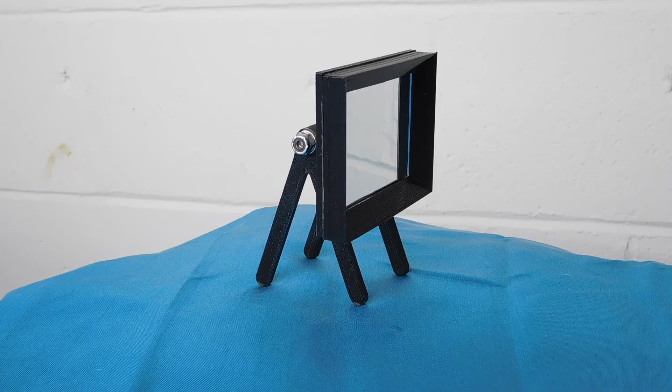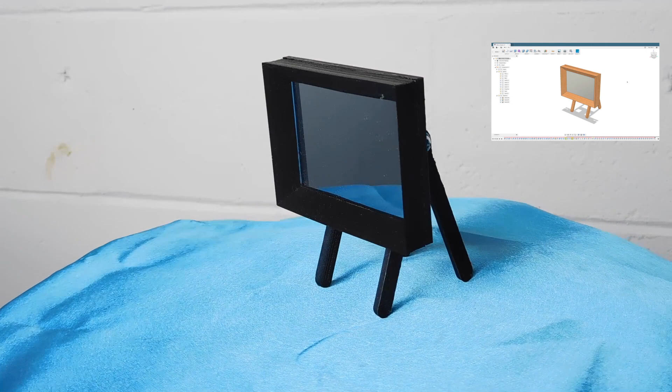I had a mirror on my studio desk for years. I used it to see if anybody was coming into the studio. It's pointed towards the door, and if I see something flash, I know somebody's walking in. It's worked really well, except the little plastic stand it was on broke recently.

Which made me think this would be a good time to practice making snap-together joints and redesign the mirror stand. What we have is a small easel-like stand. I like to design simply, without supports or being too large.

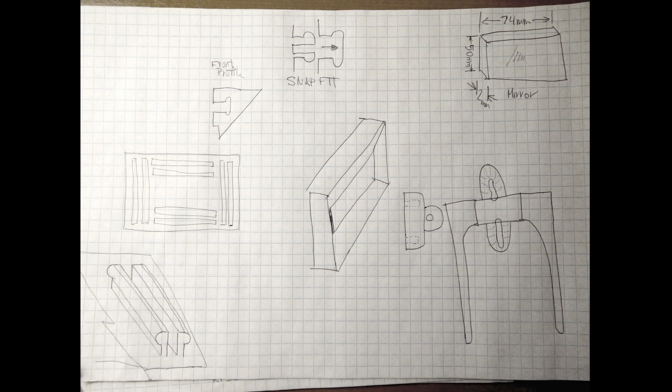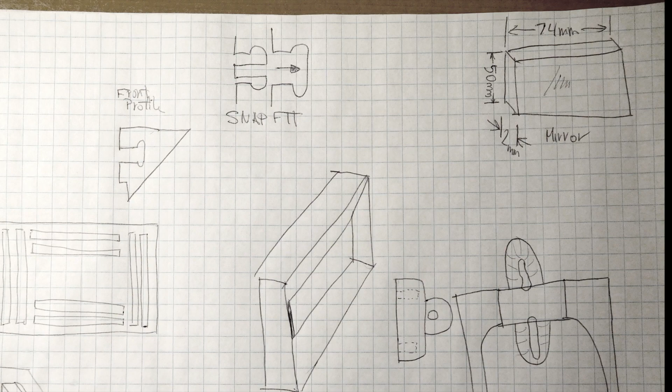As usual, this project started with a drawing. The size of the mirror is taken down, and I've drawn out a few details for the frame and stand. Now that we have a good idea for the basic shapes and have written down all the known dimensions, we can move to Fusion 360.

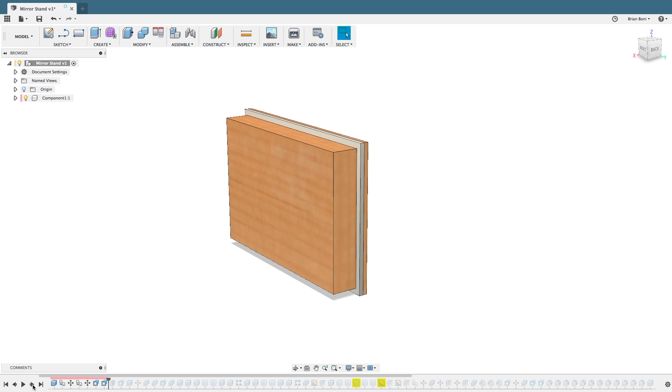I start by putting a bunch of boxes together. This box represents the mirror, with another box in front of it to represent the back of the frame. This one's going to represent the front of the frame. I'm taking another box just slightly smaller than the front and putting a 45-degree draft on it, which will cut out the picture frame from the front frame.

So here's the first part that is going to make up the male side of the locking clip. I copy another one beside it and add the round sections that's going to be the locking end. Then we duplicate that for all four sides. That works pretty nicely, so we'll combine everything into one component.

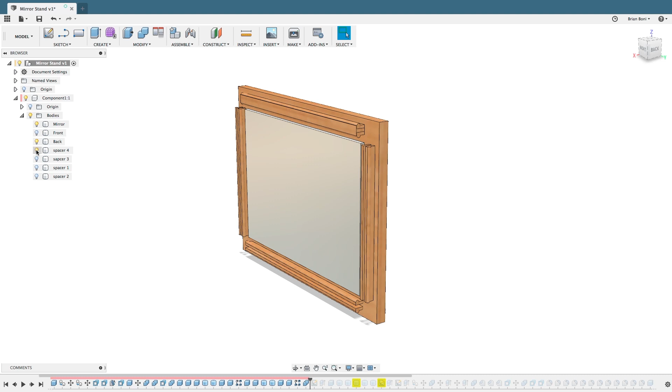Now how do we cut out the part from the other piece? What I've done here is create a set of spacers that will leave enough clearance for the clips to compress, plus a bit of space ahead of them to make sure everything goes tight together. These spacers and the clips will be used to remove material from the front frame, creating the holes plus some extra space needed.

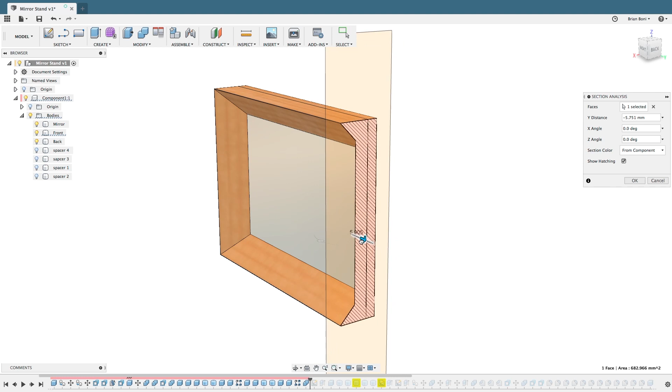At this point, I will just turn off the spacers in the design. If you look close, you can see how the spacers leave a little clearance for the part. These are the clips. When I designed them, they were beveled out at the corners just to make them easier to assemble.

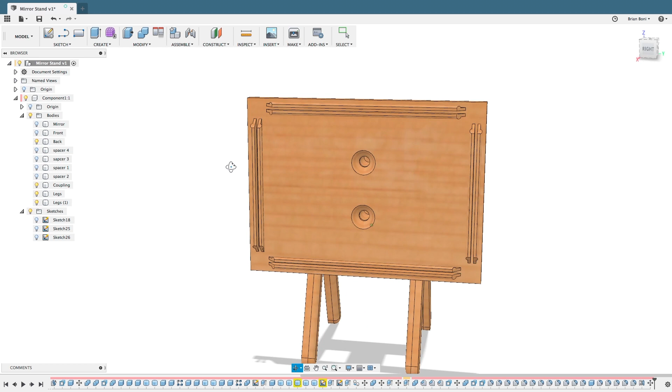The bracket that holds the legs to the back piece is screwed on. I put a drop of glue there as well, just to make it easier to assemble. I'm really testing to see if the front part clips together securely to the back part, but in the future I plan to design more parts that clip together.

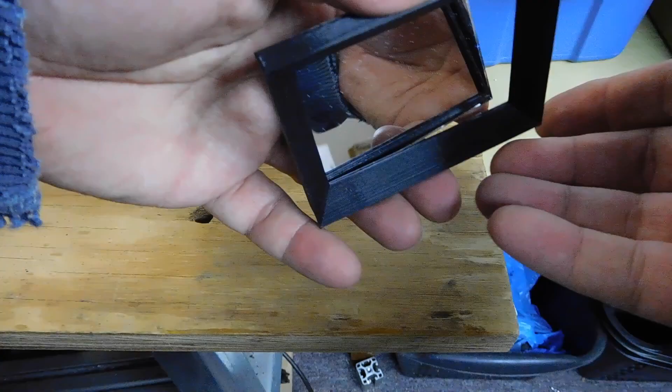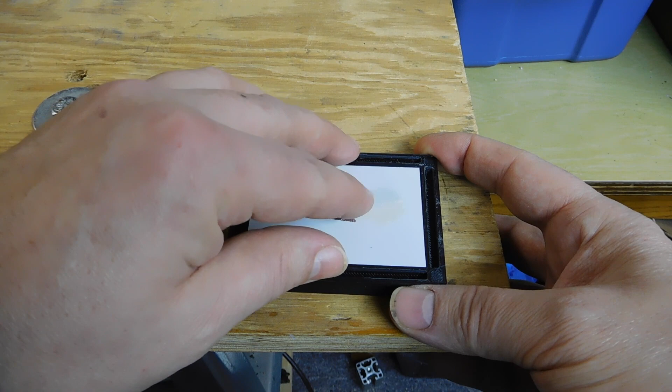So here's the mirror and the frame all cleaned up and ready to assemble. The mirror has been recessed by its thickness into the front frame. The back frame, which has the snaps, also hides the screws for the leg bracket.

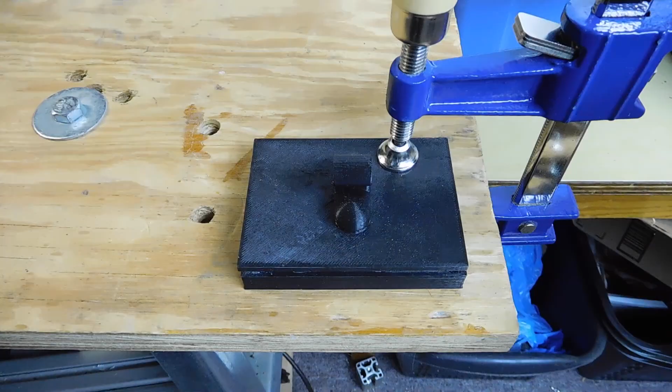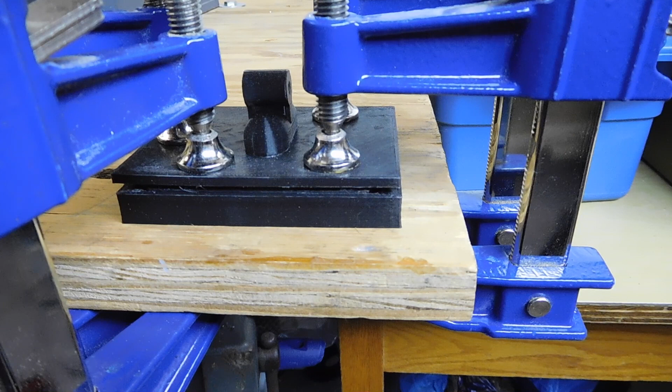Now I'm going to press together the pieces with clamps. I'm watching the little flanges. I don't want to do this too hard or I'm going to break the mirror.

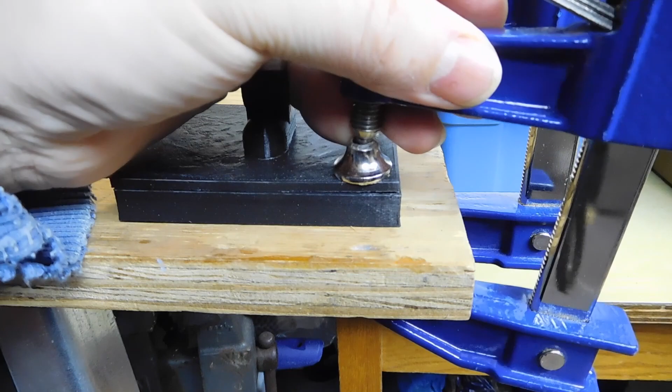I'll move these around. Okay, that's all the ones I can reach from this side. Haven't cracked the mirror yet—that's a good sign.

This back edge has not been compressed enough yet. I'll just put three clamps here along the entire back edge, and the fourth along this edge.

This is probably not going to come back apart again, at least not without breaking the mirror. Sometimes you see snap-together designs include little recesses that are clues to where to wedge the part open. I should have used these, and fewer snaps, if I ever wanted to take this apart.

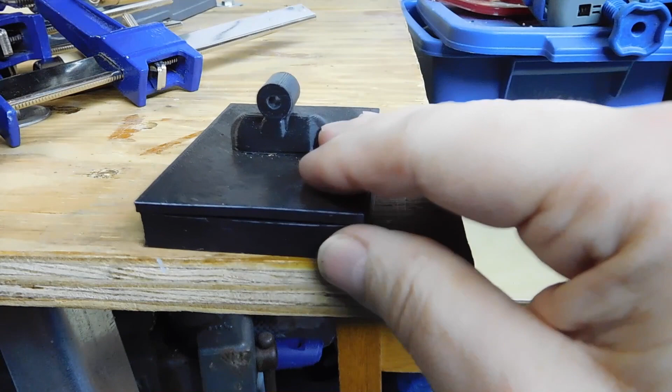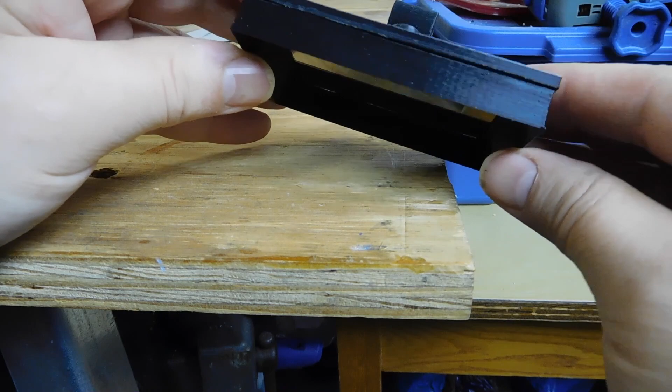As a first attempt, I'm pleased that this all works. Just one more edge to do. We are happy.

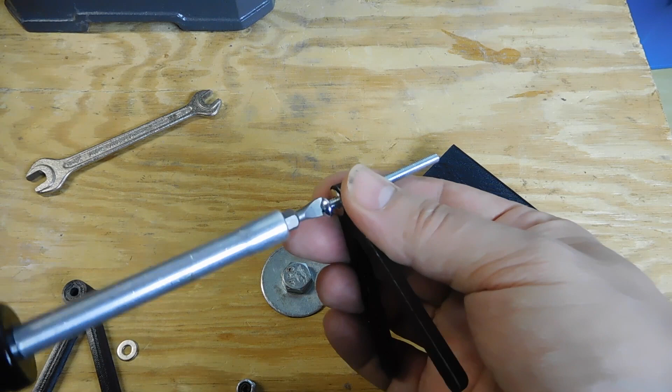Here's the assembly. We have the bolt going through the leg first. This is going to be a tight fit in the plastic, locking the thread down. Now this piece here is a little bigger and should be a looser fit, and the same for the other leg.

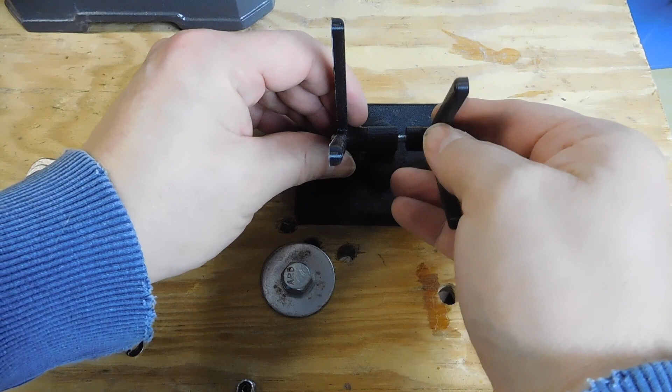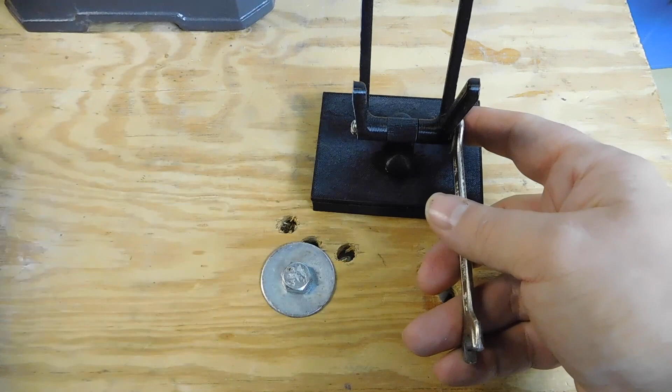On the end goes a flat washer so that the nut doesn't form itself into the plastic. Then on goes the 11/32 nylon lock nut. It only has to have a couple of threads protruding through the locking insert.

And here we have the final finished product.